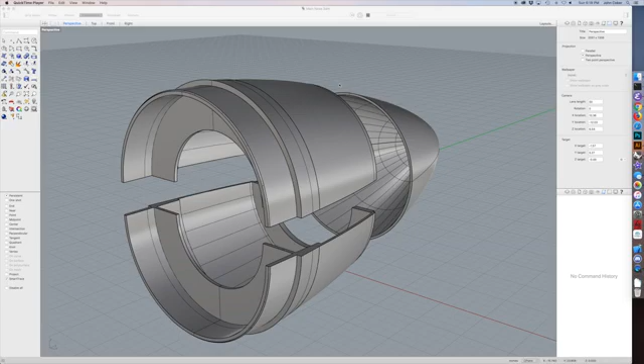Here you can see how it looks after it's been split. The tip is one part and the base is 2. There's also a shoulder that fits inside a 6-inch coupler. On the forward end of the 2 base pieces, I modeled a rabbet so that the cap could fit tightly and lock everything together. Another thing I discovered after a few false starts was modeling gussets helps preserve the shape during printing and prevent it from deforming afterwards.

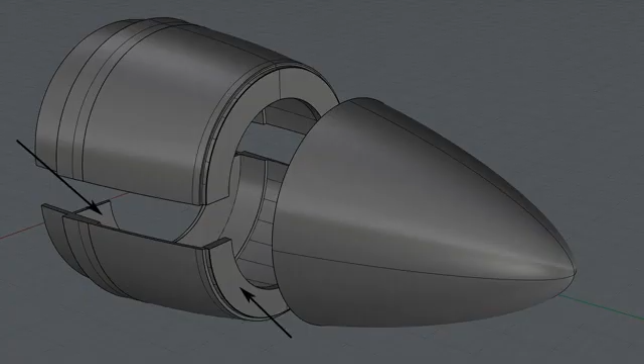Printing the 3 pieces goes pretty much as you expect. The little machine does all the work. And here are the 3 pieces ready to bond together. Epoxying these pieces is pretty much like other high-power epoxy projects. Prepare the surface, clean it, sand it, and then apply epoxy and let it cure. You can see how the 3 pieces fit together and fit inside the section of coupler tube, giving me a whole nose cone with shoulder.

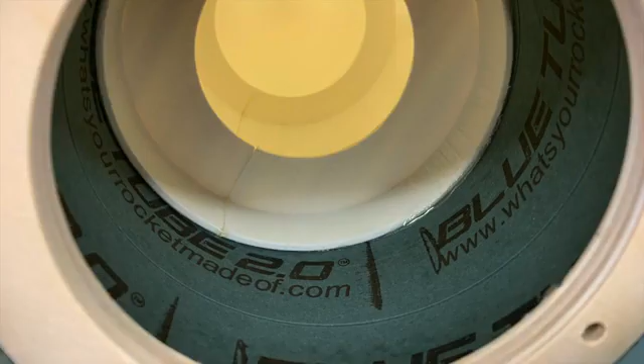The inside was finished in the usual way, with a ring to hold a bulk plate to store electronics in the nose, such as trackers or secondary recovery. Because the gussets have holes in the center, the electronics can go all the way up into the tip of the nose. The booster nose cones were even more elaborate.

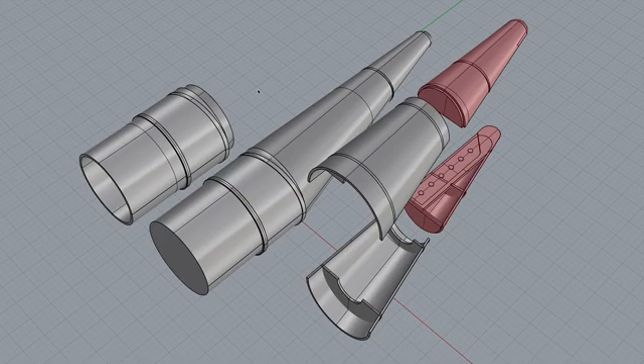I ended up making these out of 5 different parts. First I drew the outer shape of the whole thing. Then I separated out the base section, which included the coupler that would fit inside the airframe tube. The midsection of the nose was split vertically in 2, as was the tip, which also had to accommodate a piece of aluminum in between.

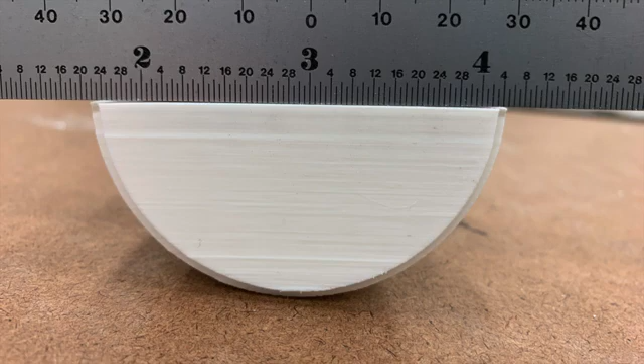One problem I ran into was that a part that was printed double thickness ended up warping a bit, as you can see where it diverges from the ruler. The fix for this was to thin the wall as well as create a small relief. Another problem I ran into was some of the parts didn't fit correctly. Part of the problem is the rough edges on the underside of the outer lip where the support material attached. The fix for this is to make this part a little thinner from the inside, as well as clean it up more thoroughly, with sandpaper and a knife, before bonding.

3D printing can indeed work for high-power rocketry, at least for rockets which aren't going to achieve extreme velocities. In this case, my sport-scale Ariane was much easier to build without having to make a fiberglass mold.